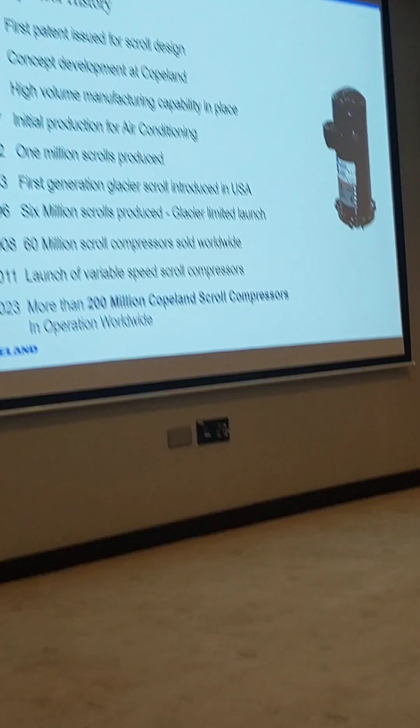This is a quick summary of the evolution of scroll compressor. As I said, 1905 is the first patent. Then the concept was developed in 1978. The high volume manufacturing facility was initially made in '79. Actual production started in 1987.

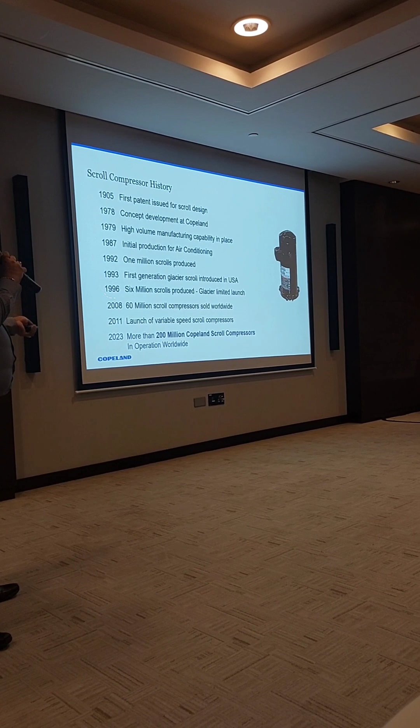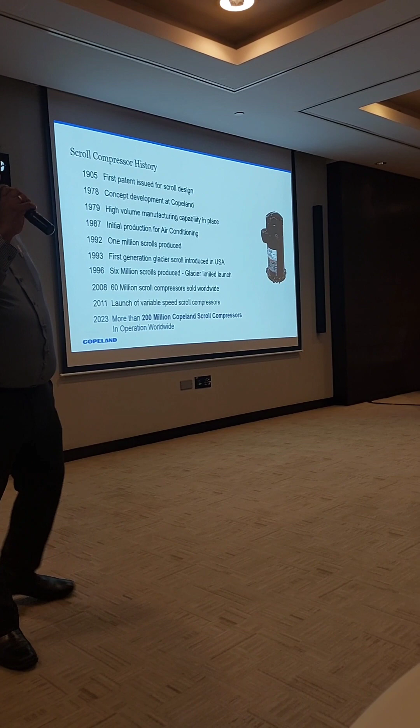Initially we were making air conditioning compressors, then we started making refrigeration scroll compressors. In '96, about 6 million scrolls were made. In 2008, about 60 million. And in 2023, we now have more than 200 million Copeland scrolls working globally in the field.

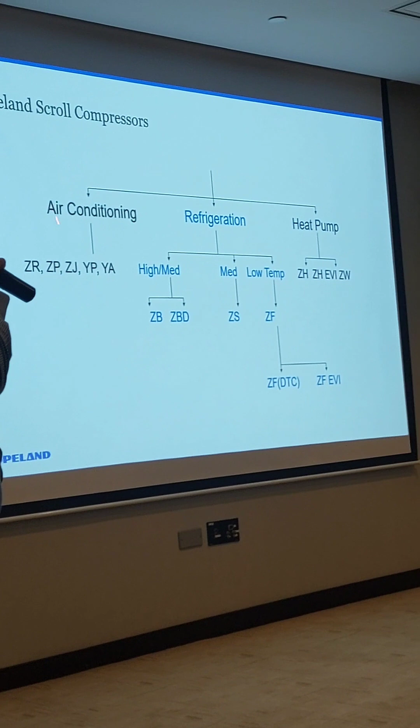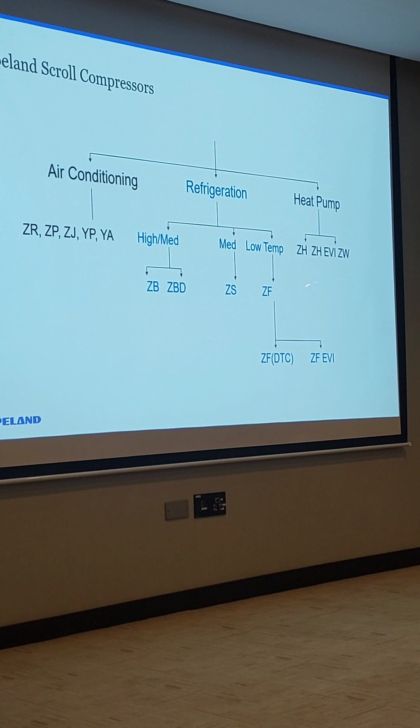If you look at the different scroll compressors available in our portfolio: for air conditioning range, we have ZR compressors. You guys would have used ZR compressors in your work. ZR is meant for R22, 407C and R134A compressors. And we have ZP as well - ZP is for 410A. We also have ZJ, that's from China, again 410A.

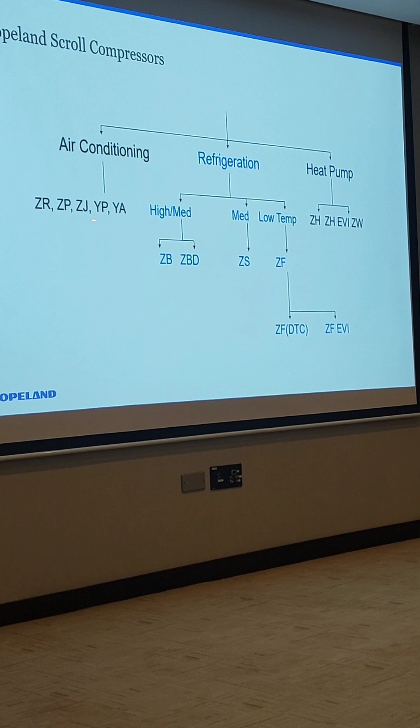We have compressors like YP and YA. These compressors are for R32 and R454B refrigerant applications. So all these compressors belong to air conditioning.

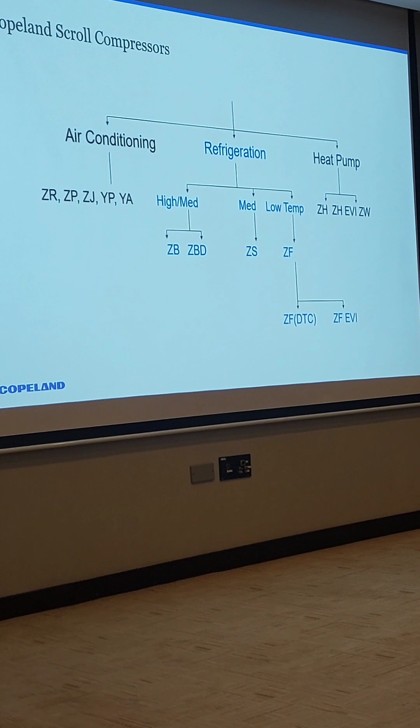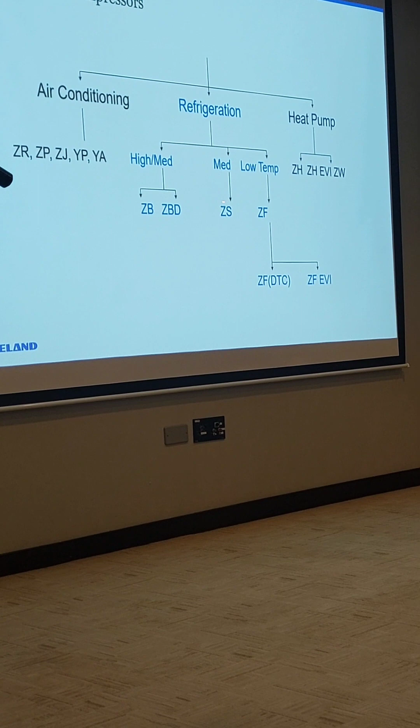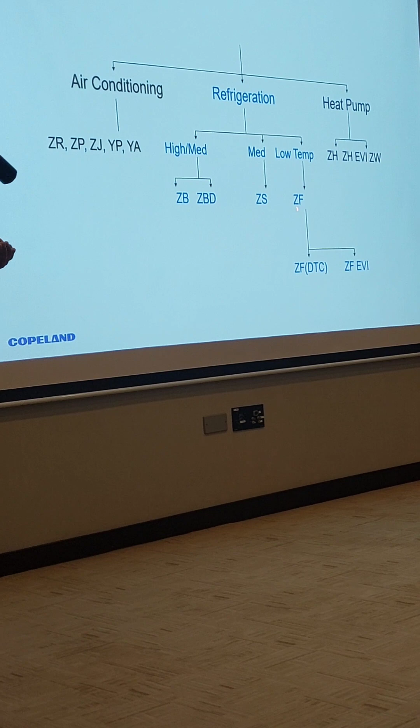When it comes to refrigeration, we have ZB compressors, ZBD compressors - these are basically used for medium temperature application. Then we have ZS, again used for medium temperature. We have low temperature compressor ZF - F means freezer, meant for low temperature application. And in ZF itself, we have ZFD as well, that is a digital compressor we have.

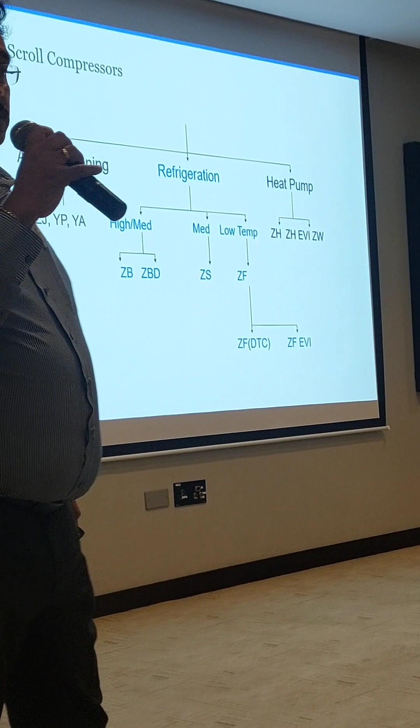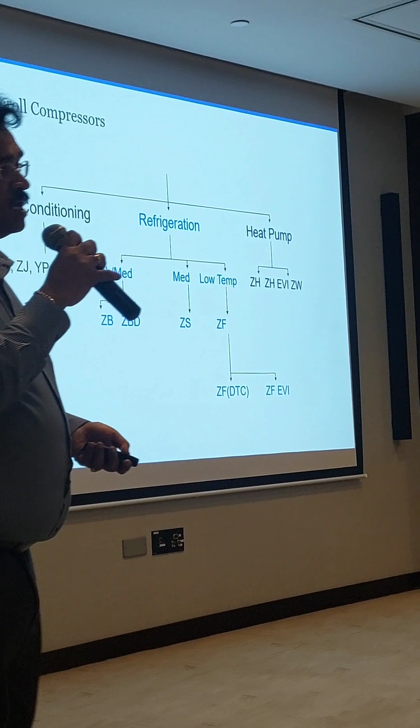Then we have ZF with EVI - EVI is enhanced vapor injection. The compressor with vapor injection is used for low temperature applications to improve the capacity and efficiency of the compressor. We also have a condensing unit called ZX condensing unit and other series of condensing units with EVI injection, enhanced vapor injection, where it improves the capacity as well as efficiency of the system.

When it comes to heat pump, we have ZH with EVI, and we also have ZW. ZW is generally meant for water heating applications, but we could also use it for industrial heating and air conditioning applications - in the sense, heat pump application, you can use this range.

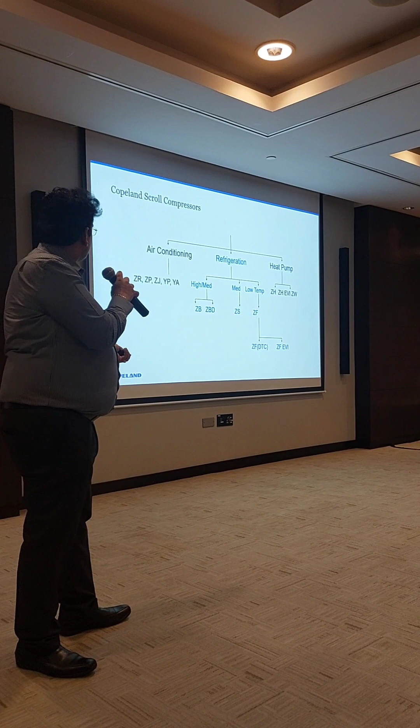If you look at the scroll compressor evolution in air conditioning, it started, as I mentioned earlier, in 1985 when we launched it. Slowly it picked up, and now if you look at the commercial range of air conditioners, more than 90-95% is with scroll compressor technology.

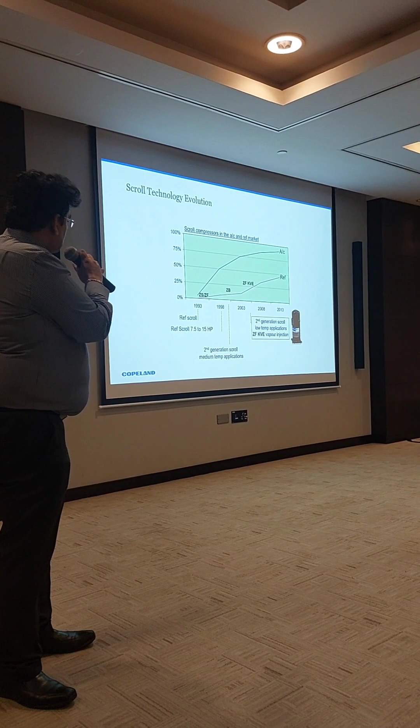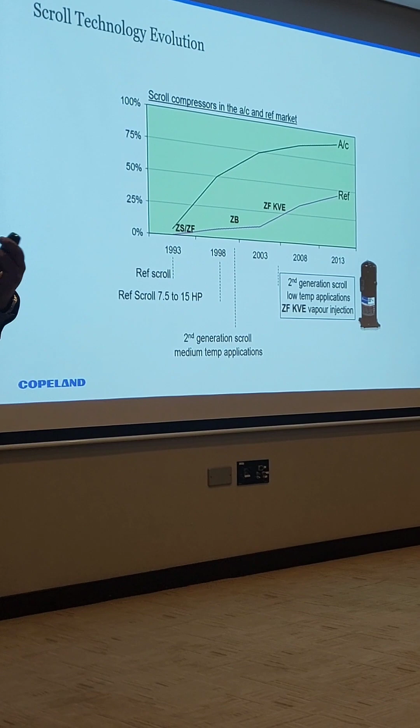But when it comes to refrigeration, it started slow, but it is steadily growing - now it is more than 30%. This was 2013, but when you look at 2022, more than 50% of refrigeration applications have also gone to scrolls.

This is a quick look at how the nomenclature of the scroll is formed.

Start with Z. Generally, wherever you see Z, that will be a scroll compressor or scroll condensing unit. So wherever it starts with Z, it is a scroll.

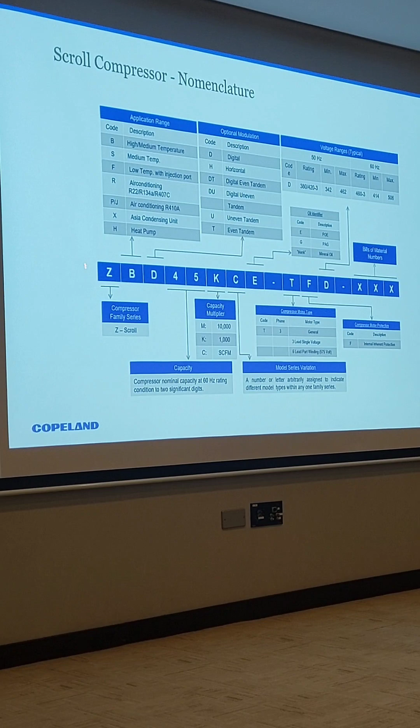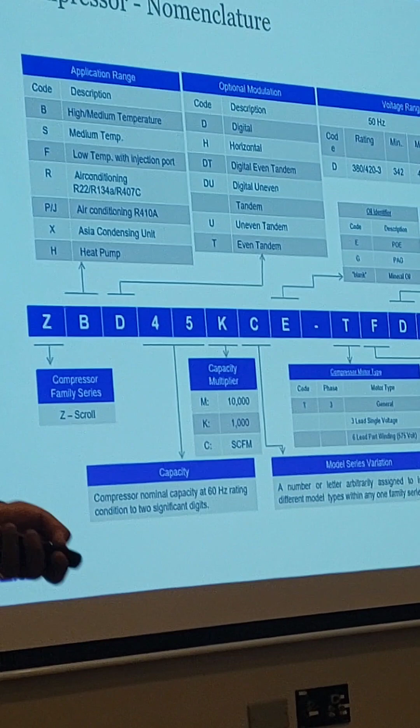The second digit indicates application and refrigerant. If the second digit is R, it is for air conditioning application, used for R134A, 407C and R22 refrigerant. If it is P or J, it is for air conditioning application for 410A refrigerant. Similarly, if you have ZF, that's for freezer application, low temperature application. ZB is for medium temperature refrigeration, and so on.

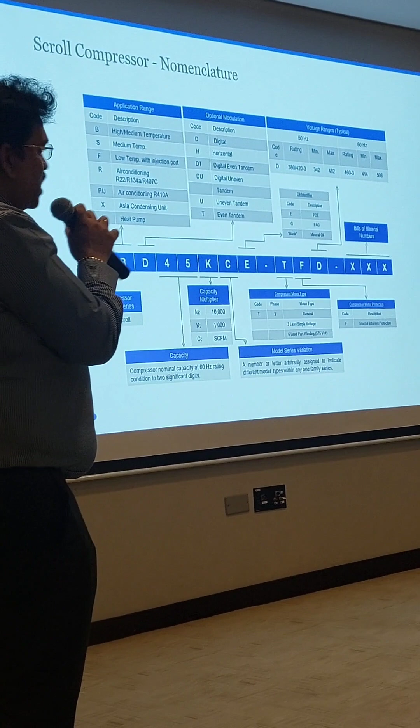The third digit indicates digital. If you have D in this third digit, it is digital. If there is no digit, it means it's a normal fixed capacity scroll compressor. We also have some models like ZPV, that is a variable speed compressor, where the third digit will be V. So V indicates variable speed compressor here.

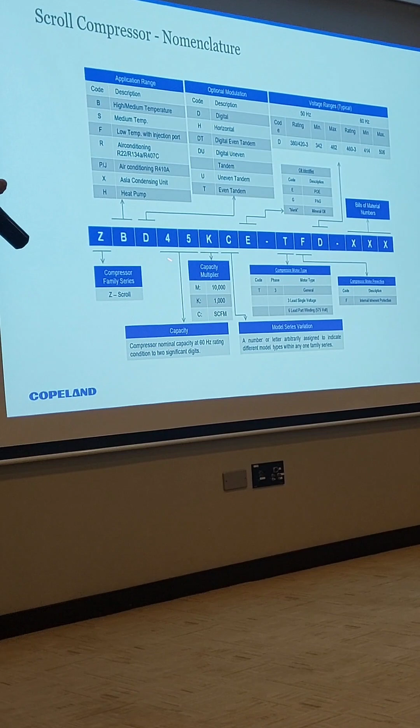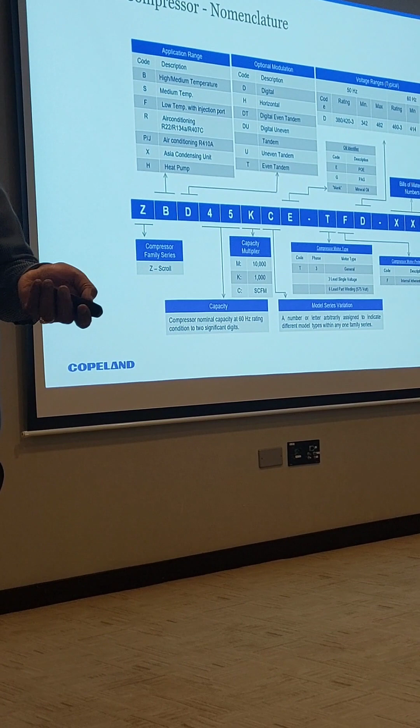Then come these numbers. You must be using different models like ZR72, ZR61 and all that. What that indicates - this 45 here, along with the K, is 45,000 BTUs of capacity at 60 Hz power supply. So 72 means 72,000 BTU at 60 Hz power supply. To make it to 50 Hz, you just multiply it by 5 by 6. Then you get the capacity at 50 Hz power supply. This is in BTU per hour.

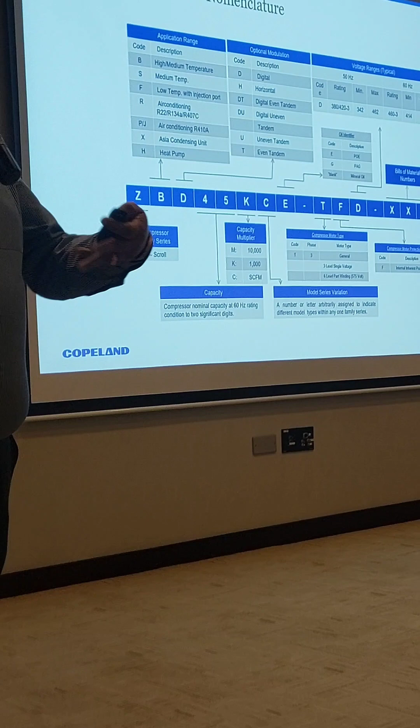That's how you check whether it's a bigger or smaller compressor. Like ZR61 is smaller than ZR72. ZR83 is bigger than ZR72 and all that. So based on the number, you know the approximate capacity of the compressor. Next time we are going to show you at what condition these capacities are at.

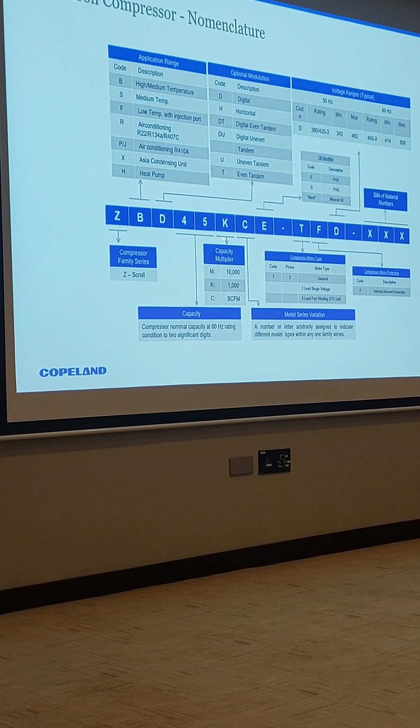Then comes this character C here. This could be C, this could be 3, 4, 5, 6, 7, any number. It's a variation in the compressor. Mostly in this market it could be C here.

Then this character E indicates POE oil. All our compressors right now, since R22 is already banned in most geographies, most countries, it is mostly only with KCE. E means polyol ester - the same oil could be used for R134A, R407C as well as R410. Even if somebody wants to use it for R22, this could be used. Some of these E compressors with POE oil could be used for R22 as well. So R22 is compatible with POE oil. It is not that you have to go back to mineral oil, no. You can use it with POE oil as well. But not the other way around.

Then comes the motor code here. TFD is the motor code. The first character T indicates 3-phase. If it is P, it is single phase. T is for 3-phase, P is for single phase.

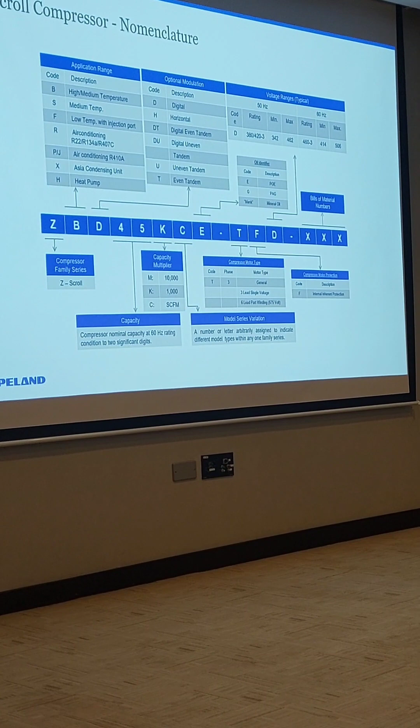The second character indicates the protection type. If it is F, there is internal protection in the compressor. Anyway, you need to have an additional overload relay outside, but there is internal protection also in the compressor which can take care of high current and high temperature. Whenever the compressor motor gets into high current or high temperature, it will trip the compressor and switch off.

Then the second character - if instead of F it is E, that's an external module. E is actually CoreSense. It's not shown here, but if it is E or W, it is an external module which is part of the compressor terminal. If you open the compressor terminal box, you find a module. So you have two types of module: one is Kriwan INT69, which we call TW, and we also have a CoreSense module that we call TE - the character will be E there. The center character will be E there. Instead of F, it will be E.

If you have a TW and only TF, you can use the TF as well. If you have a TE, in place of TE you want to use TW, same compressor model except this digit - it is possible to interchange. There's no problem.

In case you don't have that specific motor code, you can interchange it, no problem. But what's the difference between TFD and TWD? Sometimes I can use TWD, but the difference is the motor protector. In TFD, there is an internal protection, the overload relay, that will be mounted on the motor winding.